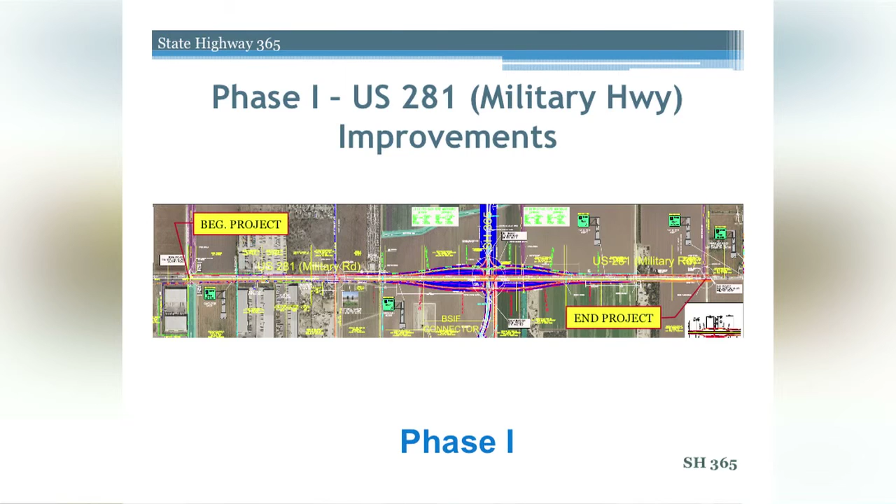Currently, the section of roadway has 2 lanes, one in each direction, with a narrow shoulder and intersections at I Road, San Juan Road, and Stewart Road. Currently, there is an at-grade intersection with a traffic signal at I Road and stop signs on the other cross streets. Here you can see a roadway curb and gutter typical section for most of the proposed US 281 improvements, and a typical section that will be basically close to where the overpass will be located.

The proposed US 281 Military Road facility will be upgraded to a 4-lane roadway with a left turn lane on most of these limits. A grade separation structure will be constructed near the San Juan Road intersection, where the proposed SH 365 Segment 1 will be located.

The proposed overpass will include 4 12-foot wide travel lanes divided by a center concrete median barrier with 4-foot inside shoulders and 10-foot outside shoulders, all along the US 281 Military Highway. The center concrete barrier will end shortly after the limits of the grade separation, and a barrier will extend beyond the I Road intersection on the west side of the proposed overpass, covering basically with a barrier in the center.

As a result of the existing signal at US 281 Military Highway and I Road, the signal intersection will be removed. A proposed at-grade intersection at SH 365 and the BSIF connector will be constructed with ramps and turnarounds. This overpass will serve to separate heavy truck traffic from exiting the BSIF and entering US 281, alleviating traffic merging at that intersection and providing safer means for truck traffic merging going east and west along US 281.

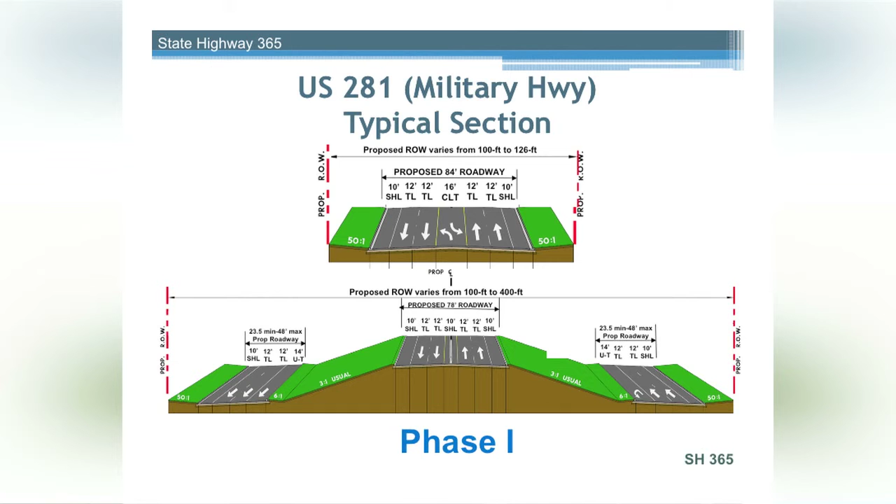In addition, included with the Phase 1 US 281 improvement project with the overpass at San Juan Road is what we call the BSIF, or Border Safety Inspection Facility Connector Road. The BSIF connector is a new location roadway serving proposed truck traffic exiting from the Pharr International Bridge truck facility and connecting to the US 281 Military Highway. It was constructed by TxDOT to route traffic from the Pharr Reynosa International Bridge to a state-of-the-art inspection facility for safety and weigh inspections of heavy truck traffic northbound from the International Bridge.

As indicated on this screen, the RMA proposes to construct a 0.7-mile connector that will allow vehicles exiting the Pharr BSIF facility to continue north to the proposed US 281 overpass at San Juan Road, SH 365. This connector will also partially serve to continue connectivity from 281 to the existing South San Juan Road connector near Dolphin Canal Levee.

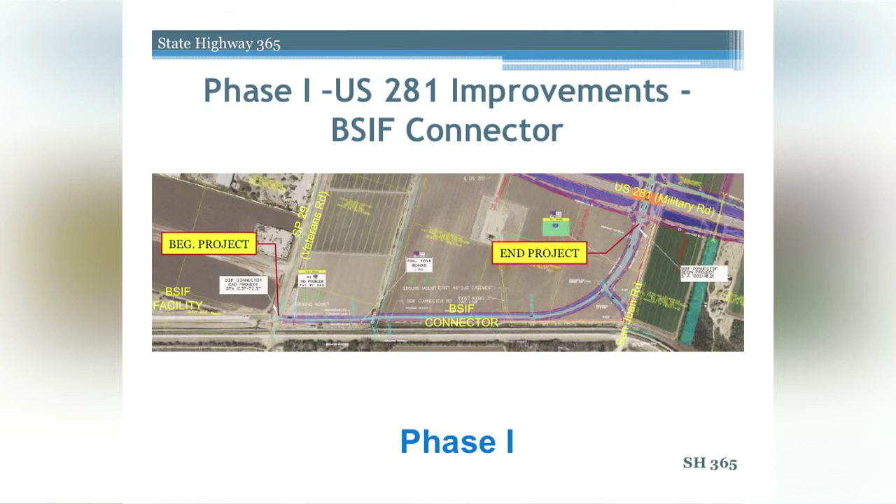Here you can see the typical sections that will be used for this connector road facility. The proposed roadway serving the BSIF truck traffic will begin with a single 14-foot travel lane with 4-foot inside shoulders and 10-foot outside shoulders. From the intersection at 281, approximately 600 feet south, there will be a two-way travel road with a 16-foot center section that will allow connectivity from the intersection to the existing San Juan Road.

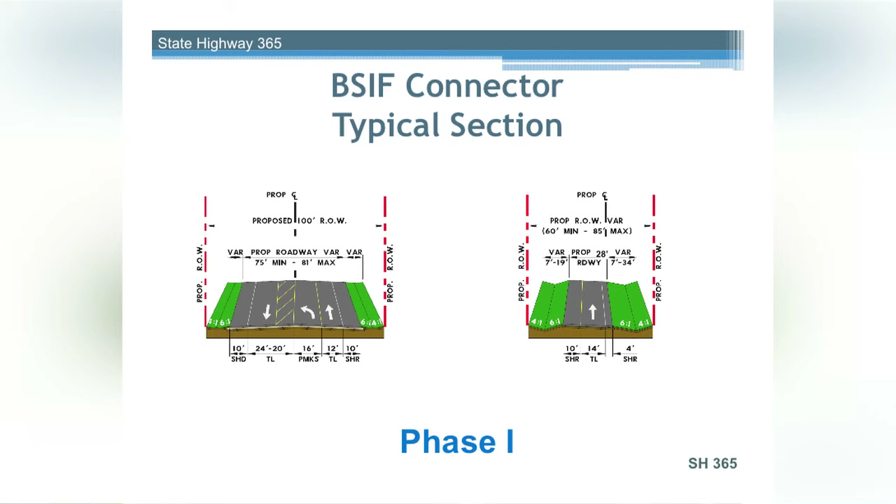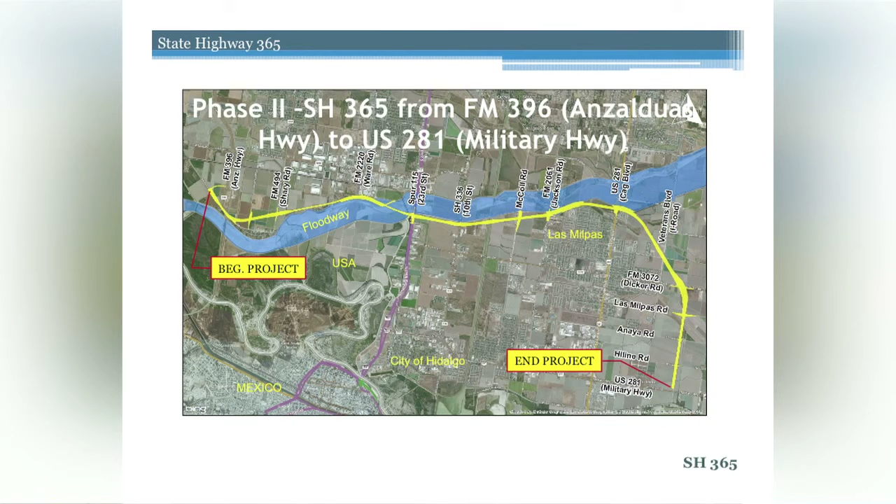Phase 2, the larger of the two projects, what we call Segments 1 and 2, will include a 13.4 mile toll road facility from FM 396 Anzalduas Highway to US 281 Military Highway. This proposed new location tollway facility will connect the cities of Mission, Granjeno, McAllen, Hidalgo, Pharr, and San Juan. This section of roadway will also include construction of an elevated floodway bridge just west of 23rd Street Canal, other canal crossings, and sections of the floodway levee that will have to be relocated within this project. The Anzalduas GSA International Bridge and the Pharr International Bridge will be anchoring this project at both ends.

The typical section shown here will be used for the Phase 2 interim construction phase. It will consist of 4 12-foot main travel lanes with 4-foot inside shoulders and 10-foot outside shoulders, divided by a grassy median and connecting at grade with overpasses at Shary Road, 23rd Street, 10th Street, Jackson Road, Cage Boulevard, Dicker Road, Anaya Road, and Hiline Road. All of these will have overpasses. Other grade separations are proposed at Glasscock, McColl Road, I Road, and Las Milpas Road, which will be underpasses.

Some sections of this interim connection or construction will have access roads, as indicated on the typical section shown on the screen. This frontage road will serve to access properties along the roadway in certain sections.

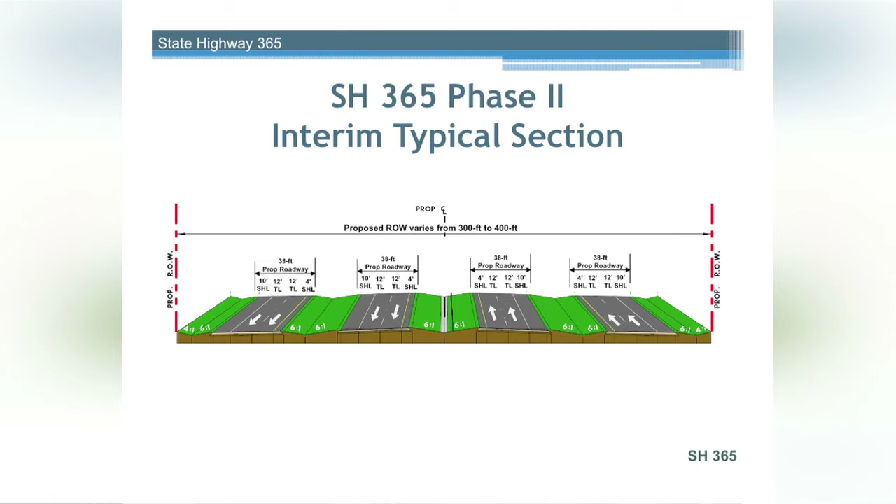Phase 3, the SH 365 construction, would also include a 3.13 mile toll facility from FM 1016 Conway Avenue, connecting all the way to the FM 396 Anzalduas connector. This adds to the length provided by Segments 1 and 2. It will also include a short west segment that will provide at-grade connectivity to FM 1016 Conway Avenue and Military Parkway to the west.

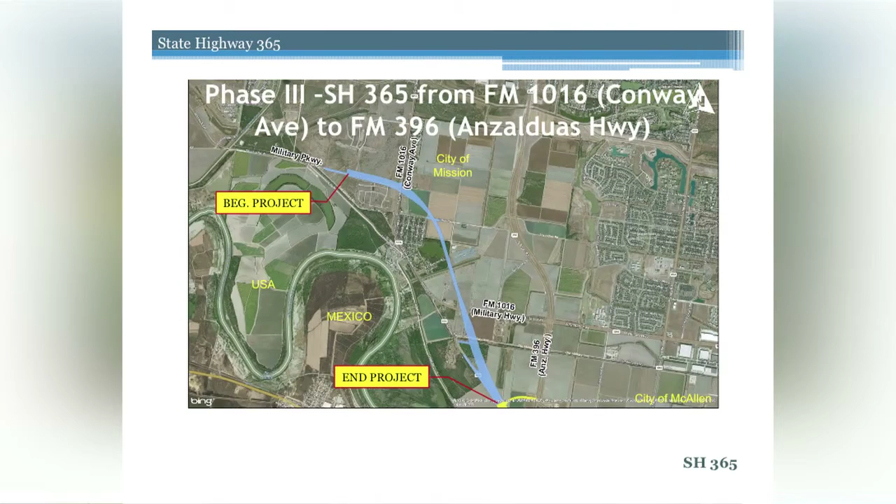The typical section that you see on your screen will be used for this Phase 3 interim toll facility. This section of roadway will continue the 4-lane facility at the Anzalduas GSA Connector Road and go west to Conway Avenue. This segment will consist of a 4-lane divided toll facility with a 4-foot inside shoulder and 10-foot outside shoulders. This section will also consist of overpasses at FM 1016, Conway Avenue, plus the railroad adjacent to FM 1016, continuing southeast and crossing FM 1016 Military Highway again, then crossing the Union Pacific Railroad once more south of 1016, and basically terminating or connecting at the Anzalduas connector with an overpass.

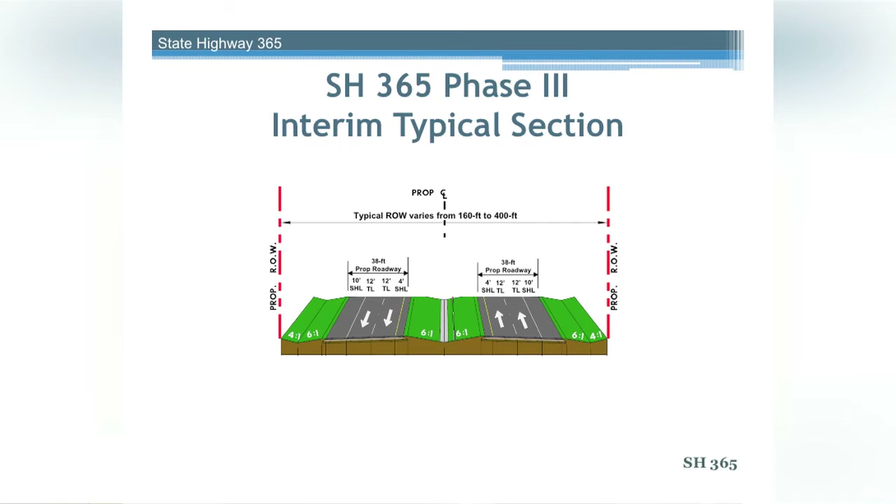Here you can see the ultimate section that you will see in this facility, and we're purchasing the right-of-way necessary to build this ultimate facility. As the chairman mentioned, this will have 6 travel lanes, 3 in each direction. The frontage road will have 2 lanes each and will have turnarounds at every overpass. This proposed right-of-way has a typical section width that varies from 160 to 400 feet of right-of-way at most of the grade intersections.

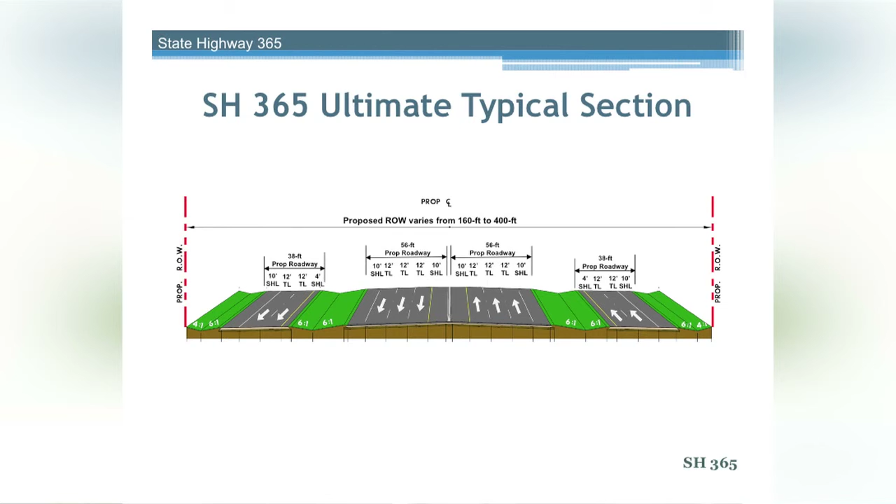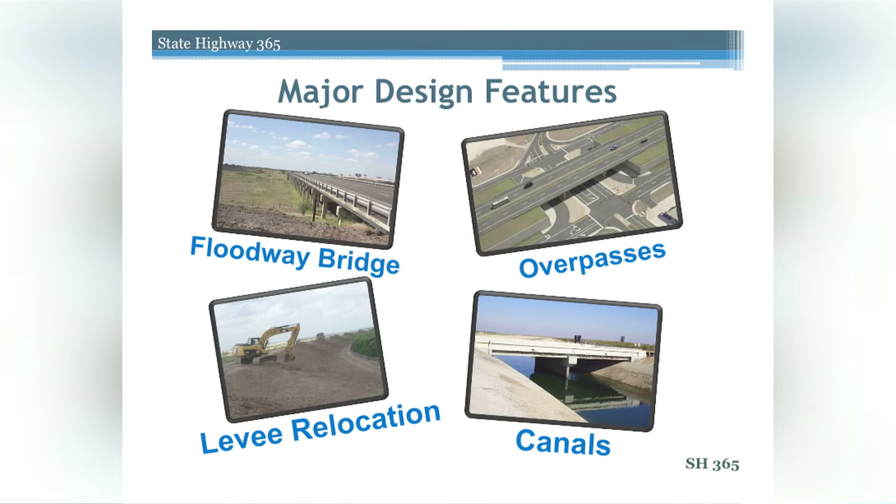Some of the most significant components or elements that you will see in this construction will be an approximately 3,000-foot-long floodway bridge crossing. There will be various floodway levee relocations, such as the one you can see on the screen. There will be 11 total grade separations, and there will be multiple canal crossings, irrigation canals that will be crossing the facility.

Basically, this concludes the presentation of the technical part of the presentation, and I would like to give Mr. Pilar Rodriguez now the podium.

Thank you, Mr. Lopez. Shown on the exhibit boards in the hall, which are just outside the door, is a trip analysis for use of the proposed State Highway 365 project, and this is what that exhibit board looks like. The costs have been provided for both auto and truck use. Access where existing toll roadways are present along the project will be provided as part of the proposed project.

The cost for an auto exiting the Pharr Reynosa International Bridge traveling to the Anzalduas Bridge, or FM 396, also known as Anzalduas Highway, approximately 17 miles, would be $2.83. A 5-axle truck would pay $11.37 for the same trip. A representative from the Regional Mobility Authority is available at the toll exhibit to explain the proposed trip costs along State Highway 365.

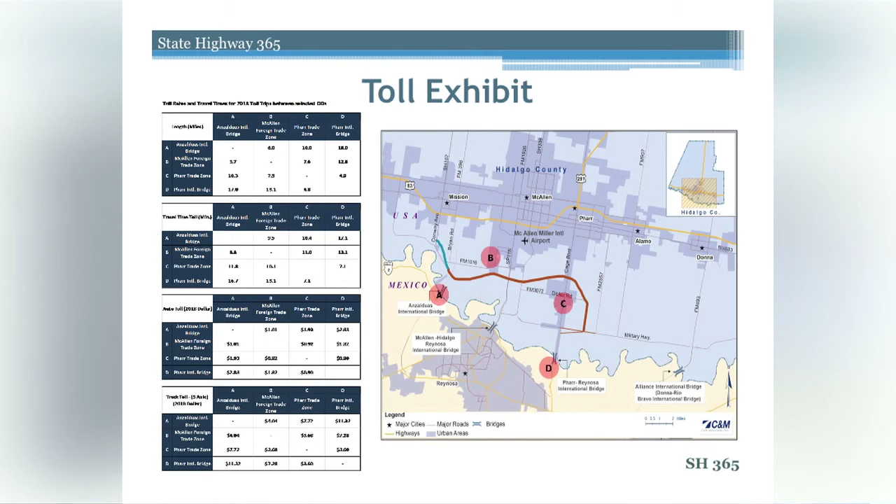The Regional Mobility Authority and TxDOT, in partnership with the Texas legislature, plans to designate the State Highway 365 project as an overweight truck corridor. The project has been designated to accommodate overweight trucks, unlike a conventional roadway. Right now, the legal limit for trucks is 80,000 pounds, and overweight will be going up to 125,000 pounds gross vehicle weight.

The designation will make the free trade zones more attractive to foreign truck traffic and will keep overweight trucks within the designated route. This will also reduce the number of trucks because if a truck can carry a heavier load, in theory, you'll have fewer trucks on the roadway. The permit fees will be used to maintain the roadway, including the corridor, and cover administrative costs. Right now, that's $80 per trip.

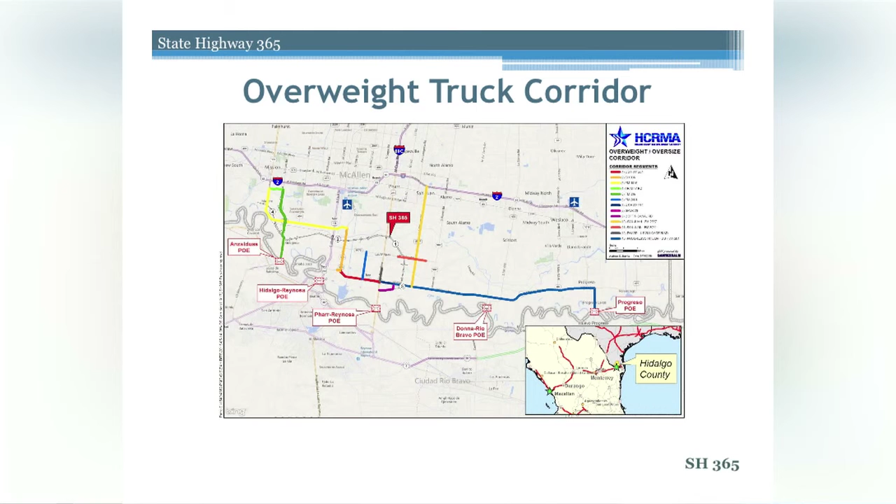At this time, I'm going to turn the presentation over to Sharon Becca with Atkins Environmental, and she'll give you an overview of the environmental portion of the project.

Good evening, everyone. Thank you, Pilar.

Since the project has federal funding, the National Environmental Policy Act, otherwise known as NEPA, has to be followed to ensure the decision-making process is conducted in an open and collaborative manner with full disclosure of the environmental impacts. NEPA, as it's affectionately called, evaluates alternatives, including the no-build or no-action alternative, and tries to avoid, minimize, and or mitigate impacts to the affected environment.

The environmental review, consultation, and other actions required by applicable environmental laws for this project are being or have been carried out by TxDOT pursuant to Title 23 of the United States Code, Section 327, as well as a Memorandum of Understanding dated December 16 of last year, executed by FHWA, the Federal Highway Administration, as well as TxDOT.

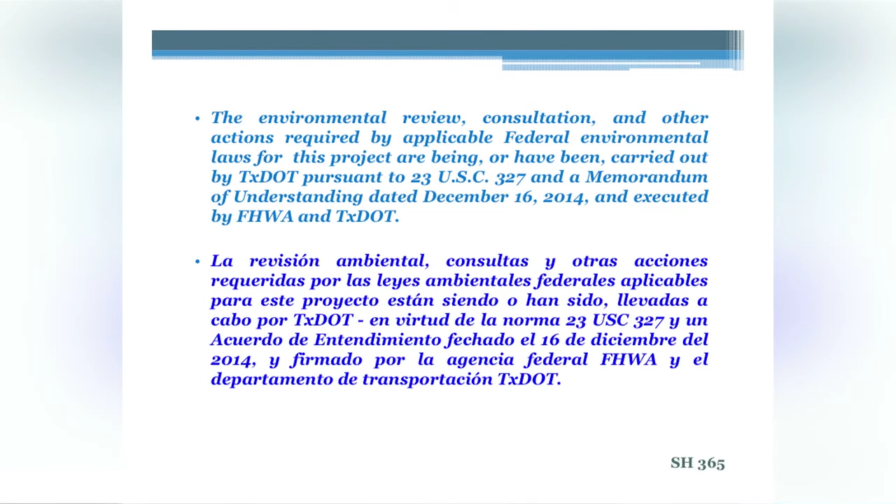So moving on to the next slide, where we talk about environmental items considered during the process. It lists all the resources that must be considered in the environmental evaluation of roadway projects. I won't read through all of them, but essentially the potential impacts of the proposed project, if constructed, on each of these resources or factors was assessed and documented in the environmental document.

Some of the highlights include things such as relocation and right-of-way requirements, air quality as well as noise, wetlands and waters of the U.S., threatened and endangered species, which is one of the big items down in the lower Rio Grande Valley. And again, please read it at your leisure. But in essence, a draft environmental assessment has been prepared and was approved by TxDOT as satisfactory for further processing on April 8th this year.

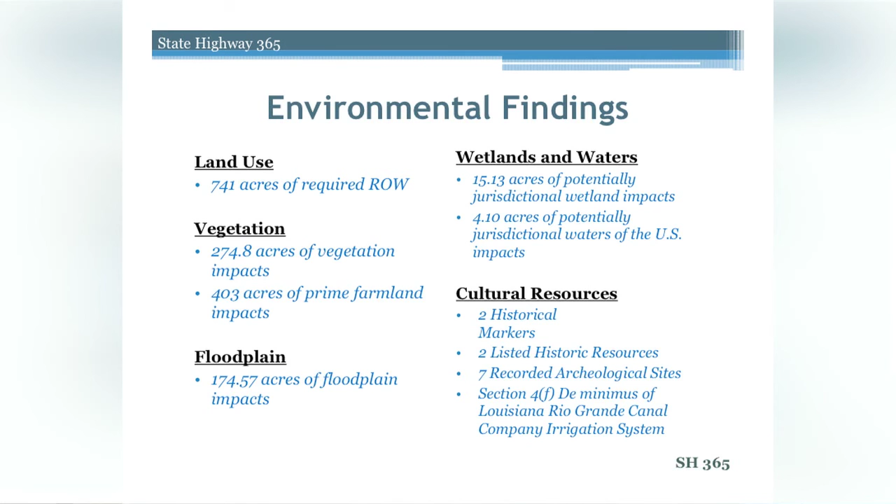Thank you, Sharon. This project, as has been described to you tonight, will require, like Sharon said, 740 acres of right-of-way, and will consist of 9 potential displacements: 3 of them will be residential, 5 will be commercial properties, and 1 church.

There are 2 booklets available to you, both in English and Spanish, at the right-of-way table that explain the process. If you exit this door and hang a left and follow the exhibit boards, that table is by the last exhibit board.

One of the booklets is titled The Purchase of Right-of-Way, and the other one is titled Relocation Assistance. Also on the table, you'll find the landowner's Bill of Rights for you to take and review. If there is a possibility that some of your properties may be acquired and you did not pick up the booklets, you can secure copies at the right-of-way table after this hearing. These booklets contain a valuable amount of information, and we encourage you to pick these up and be familiar with the right-of-way process.

After TxDOT issues an environmental decision, the Regional Mobility Authority will then retain an agent who will begin to acquire the property on behalf of the Regional Mobility Authority in accordance with state and federal laws outlined in the booklets and on the TxDOT website.